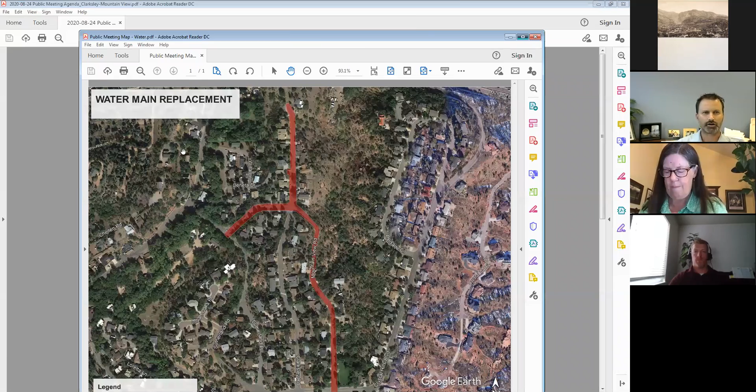So this is the water main replacement limits on Clarksley Road. We're starting up at the dead end on the north, going down to Mountain View Road, then following the existing mains, branching to the west to Sutherland, and down Mountain View Road to the south to Sutherland as well. The existing mains are 2-inch and 4-inch, and we will be replacing with 8-inch water mains. We will be replacing the existing fire hydrants and adding 2 fire hydrants, one at the intersection of Mountain View and Clarksley, and one down here at Mountain View and Sutherland.

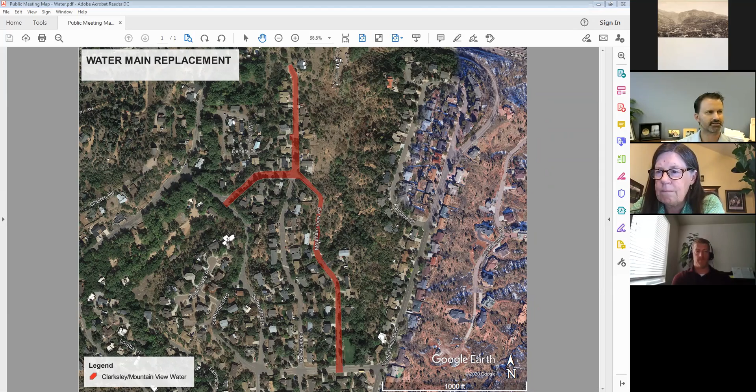The sanitary sewer component of the project will be within the same limits, although it'll be more localized. Start of construction for sanitary sewer will begin at about 139 Clarksley, which is Andy Wells' home, and we will be replacing into the intersection of Deneta, reconfiguring that connection at Deneta.

Then continuing the sanitary replacement to Mountain View, following Mountain View all the way to about 20 Mountain View Road. At that location, the existing sanitary heads to the west and runs behind the homes of the residents south to Sutherland. So we're going to stop at that location, stub it or connect to the existing sanitary behind the paving, and allow that to be a future project for the city.

So with that, that's a quick overview of the scope of the project.

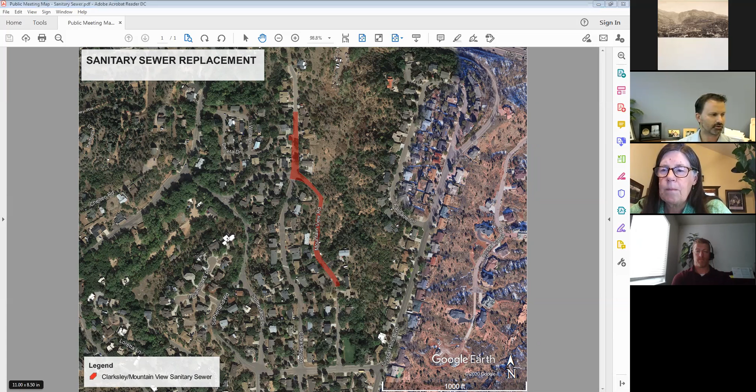Again, in compliance with the requirements for the funding, we looked at a couple alternatives, more or less conceptually, without a full depth analysis. The first alternative would be to do nothing. The city would continue to maintain the existing system, addressing maintenance and repair concerns, with the potential that continued backups would occur in the future as well. Clearly not in line with the city's desire to make improvements, but an alternative nonetheless.

The other alternative we quickly looked at was to replace the system in kind, meaning the existing sizing would be replaced with the same sizing. So the 4-inch water main would be replaced with a 4-inch water main. Fire hydrants would be replaced at the same locations, with no new fire hydrants installed. Manholes and sanitary sewer would be replaced in kind. So there would be system improvements in the sense that the city receives new infrastructure, with improved maintenance components because they're new, but it doesn't address any capacity issues, and potential for backup would still continue.

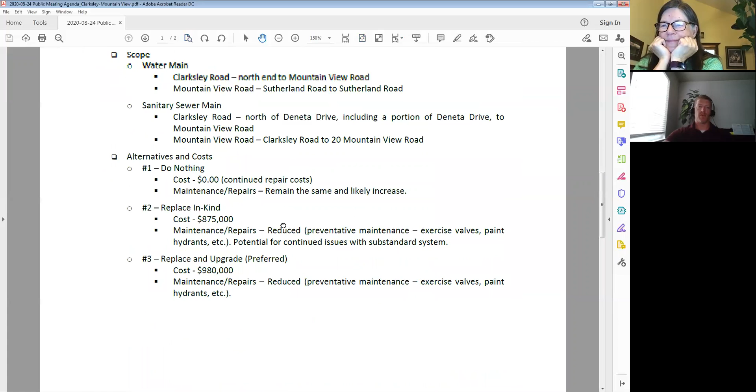Hey Glenn, sorry to interrupt you, would you just zoom in on that? Zoom in on the PDF, the plus sign there, the 76.4% or whatever, so everyone can read it. Yeah, just keep going up. Just zoom in on your PDF. Okay, this one here, sorry. Yep, there you go. Okay, now everybody can read it better. Yeah, no thank you, I thought you had a side peek at my plans that were on another screen, so I was like, wait a minute.

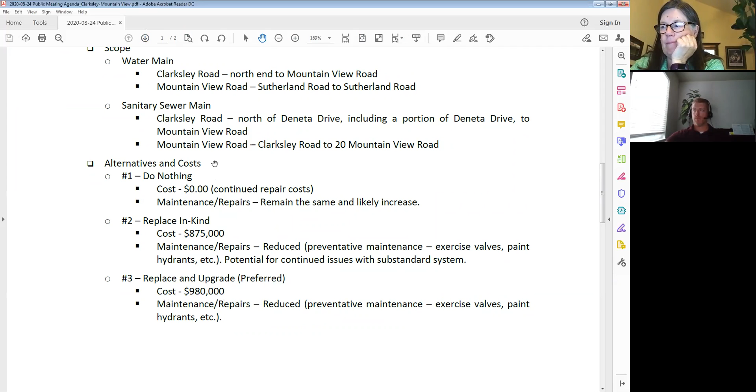So that gets us through those requirements. We'll talk about the bidding process, but that's the cost estimate. And once we have firm cost, those will be tied to the project funding moving forward. As Dole had mentioned, there's a number of things we need to talk about and be cognizant of during construction.

First and foremost, I believe, would be coordination with the homeowners and residents who will be impacted. With the narrow roadways, there isn't a lot of area to stage material and get vehicles passing through those areas. So we've come up with a phasing plan, as Dole had indicated. Let me pull that up. I'll first show an overview of it, and then we can zoom as needed. But we've got the project broken into 5 phases.

Phase 1 would be from Deneta up to the north end of Clarksley, building the water and sanitary sewer, getting those systems up and running. Second phase would be from Deneta into the intersection of Mountain View, closing off that intersection and building the infrastructure there. Phase 3 would be Mountain View to the west to Sutherland, and that would just be a water main, so the project should be quicker through that area.

Phase 4 will be Mountain View to the east of Clarksley to the 20 Mountain View, which will involve water main and sanitary sewer construction. And then phase 5 will be south of there, and it'll just be water main through there. And again, as Dole indicated, we broke this project up to minimize long-term disruptions, but allow traffic to continue to flow through the project site.

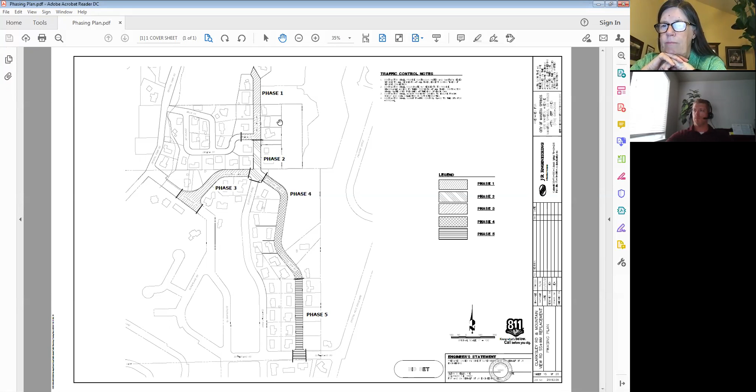The contractor will be required to dial in a little closer on the phasing. I'll zoom in on this area. With the project going on, how is this property owner at the far end going to be impacted? Is it necessary for them to be completely disconnected all day, every day during construction, with limited space for parking along the roadway?

We've indicated that the contractor is required to open up the roadways at the end of each day, either by backfilling or plating any open trenches. They need to coordinate with homeowners to allow services to continue, such as mail and trash pickup. They'll be required to provide us a plan of how they're going to coordinate and make this work, and to provide a notification, whether a flyer or something dropped at the front door, to all property owners impacted along the project.

They'll have an initial contact indicating the project scope, providing contact information, and what to think about in terms of how construction will impact them. Then as construction progresses, they're required to provide updates on upcoming phases, saying, hey, we're going to be in your phase within the next two weeks. Please contact us with any needs you need us to be aware of.

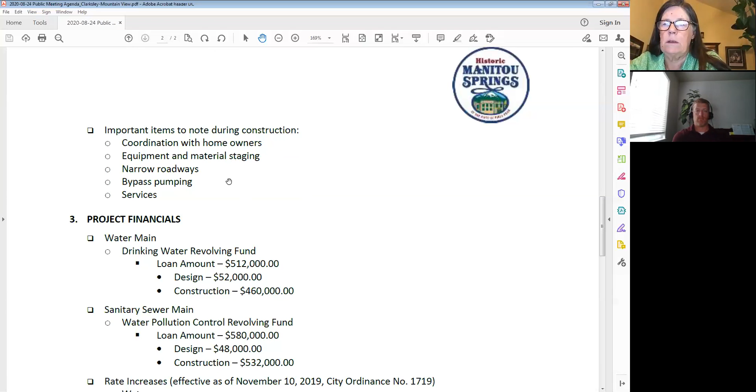Bypass pumping of the sanitary system is most likely going to be required as they build the new system and tie in the services. We require that the contractor provide a plan for us to review and approve before they do any of that work, to keep services flowing and make sure there's no potential for backups during construction.

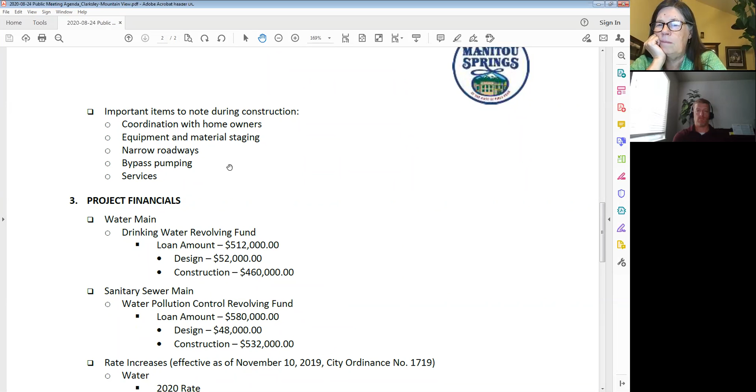All homeowners will receive new water and sanitary sewer services. For water, they'll receive new service up to their curb stop, close to the back of the curb in most cases. For sanitary sewer, new service will be provided from the main to the back of the curb or back of the paving, and the project will install a new cleanout to facilitate future cleaning of the system as maintenance needs occur.

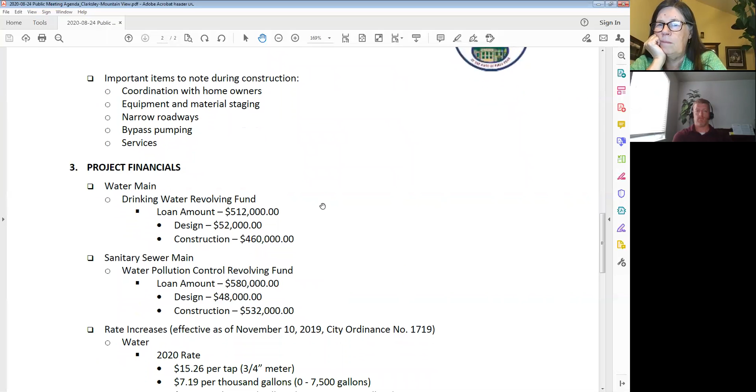That touches on all the construction components. Dole, did I miss anything you think I need to touch on a little more, or does anyone have any questions?

I had a quick question. Will the residents have any responsibilities in terms of hooking up or unhooking anything?

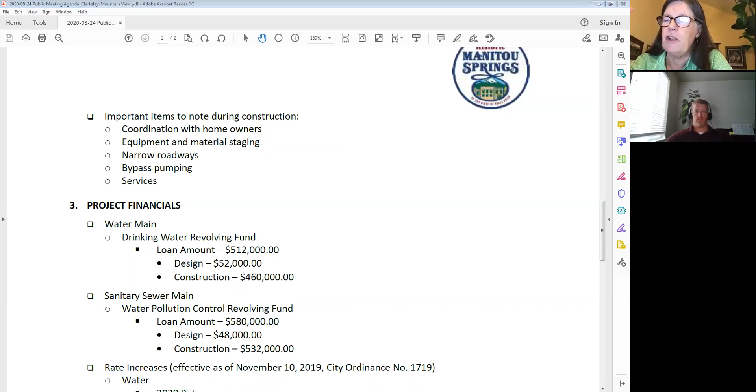No, if they have special needs, they'll need to make that known to the contractor. But for the most part, as the contractor is excavating, they will find where the existing water and sanitary services are located and make the connections. There's at least one property owner with a force main on their sanitary, this homeowner here, who has a pump in their basement.

We'll need to coordinate with them regarding special needs, like whether that pump is on a schedule or a float. We want a good handle on that system so we're not making disconnections at a crucial time for them. Our plans also indicated there may be a force main on this home, so we'll follow up with them to confirm that and make sure it's addressed adequately.

In terms of trash pickup, I've been on projects where homeowners put the trash at the curb and the contractor picks it up and brings it to a centralized location for the company to collect. Likewise, if mail delivery is a concern, they put in temporary mail facilities that the post office can drop off at, and homeowners can walk and pick it up there. So there are definitely coordination components that still need to be worked through as the contractor goes through the project.

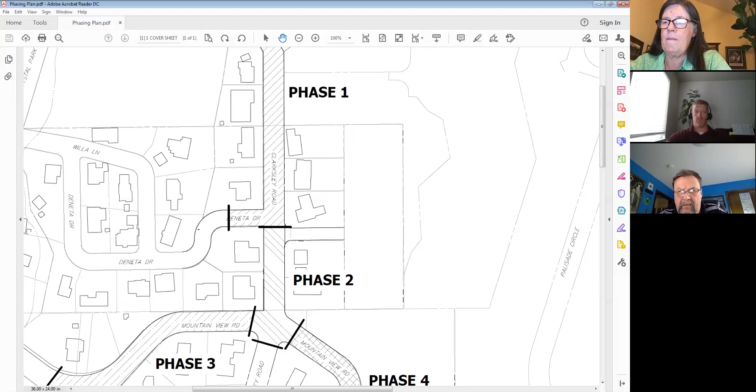Okay, go back to the agenda. So project financials, again, a requirement that we've got to touch on.

The city is obtaining two loans: one to replace the water main, which is a drinking water revolving fund loan, and the second for the sanitary sewer, called the water pollution control revolving fund. Both of these are 20-year loans through the state, and they're low interest loans.

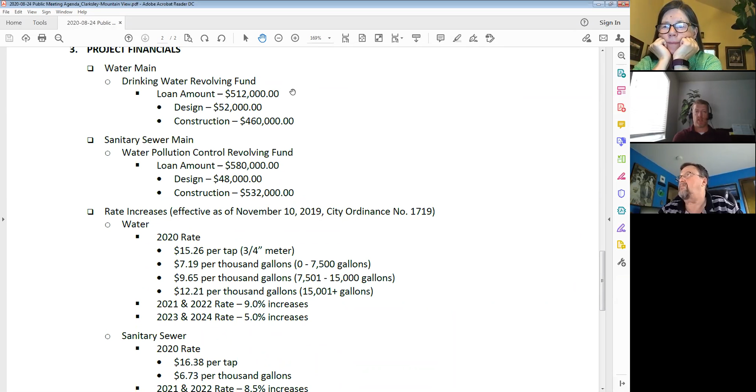Currently, the city's applications are for just over $500,000 on the water, for construction and design, and you can see the amounts in the application at the time. The sanitary sewer is just under $600,000, with the breakdown shown there. We won't be finalizing the loan before construction starts, so these numbers will be fine-tuned to the actual bid amounts, with maybe some contingency for overages or underages along the way. But those are what we've got established for the project.

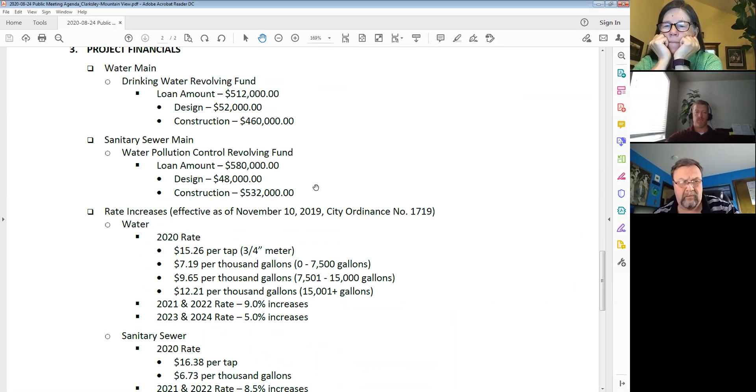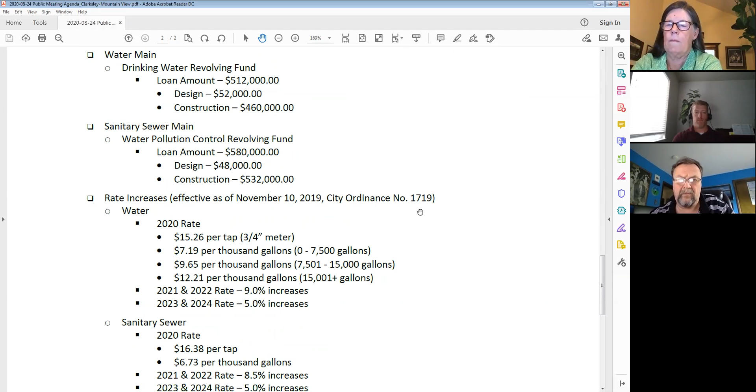To make that work, the city, back last fall, had an ordinance passed to increase rates throughout the city, not just for this project but for a number of future water and sanitary sewer projects. I've listed what those rates are. I believe a 9% increase had already occurred at the end of 2019, so those are the current rates listed here.

In 2021 and 2022, there will be a 9% increase in both years for water, and an 8.5% increase for sanitary sewer. Then in 2023 and 2024, there'll be 5% increases. Those are based on a rate increase study that looked out 10 years in advance. Depending on how bids go and as the project or city's needs change, the city may look for additional increases, but these are the ones currently approved. Again, these are increases that need to be shared with the residents so they know how the project is being funded in part.

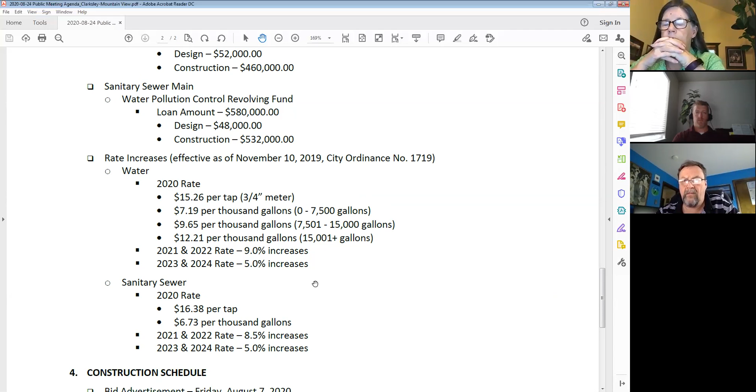And then lastly, construction schedule. The contract is currently, or the project's currently out to bid. August 7th is when we advertised. As Dole had indicated, we've got 57 plan holders currently. What I don't have listed here is we have a pre-bid meeting.

It's non-mandatory, so it's open to any of the contractors, and there's no fault if they don't attend. But it's this Wednesday, August 26th, and then bids are going to be due at the end of the day on Friday, September 4th.

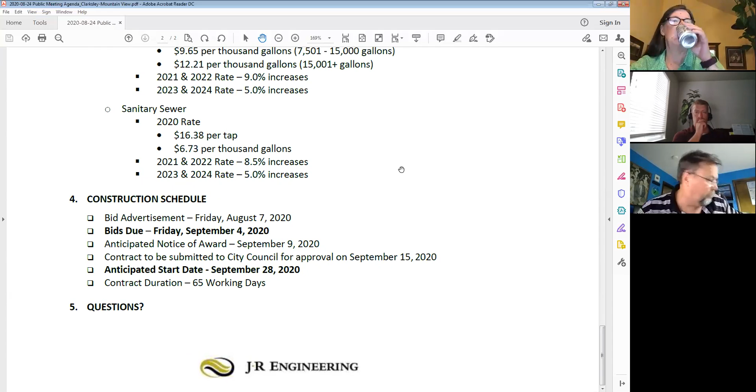And we do have a fairly aggressive schedule outlined, at least for ourselves. I know Dole's got to do some things on his end to get it on the council agenda, but we're looking to have the project awarded September 9th, have it on the agenda for the 15th to award the project, and then start construction at the end of the month of September.

And the contract currently has a working day schedule of 65 working days, so that's about 13 weeks. If there's weather impacts where the contractor is not able to work, that won't be held against them. So this will push construction up towards the end of the year.

And with that, I'll open up to questions and we'll turn it back over to Dole if there are none. Go ahead, looks like Tom has a question.

Yeah, I don't know, is my mic on? I can barely hear you. Okay, I'm the owner of the property at 140, so right across from Andy and right next door to Randy.

Okay, let me pull up the phasing map really quick. So Andy's here, yeah, I'm right across that way. So you're this one? No, across the street from Andy. Oh, right there, right there. Yep, you got it. So I own that one. It's rented out. And is it possible that I can get copies of whatever notices are being put on there?

That just so I have it in case the tenants call. Yeah, if you can provide us with your email address, we can email that to you.

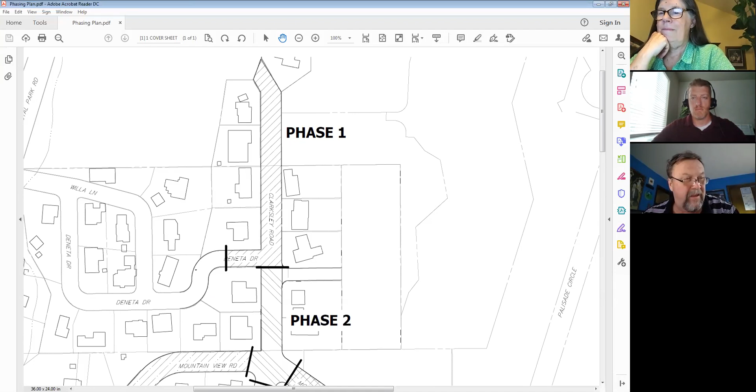You know, Glenn, the one thing too I would point out is that we intend to have one point of contact that the residents will have access to, where they can call one number and talk to one person to help if they have any issues. They won't have to talk to one of the guys in the field. So we are trying to make sure that we have a good representative out there. Everyone knows the phone number, so if there's any issues or challenges, they're all calling the right person.

Right. Yeah, we'll be able to review that notification that the contractor shares, so it has the message that we want to share and has that information on there.